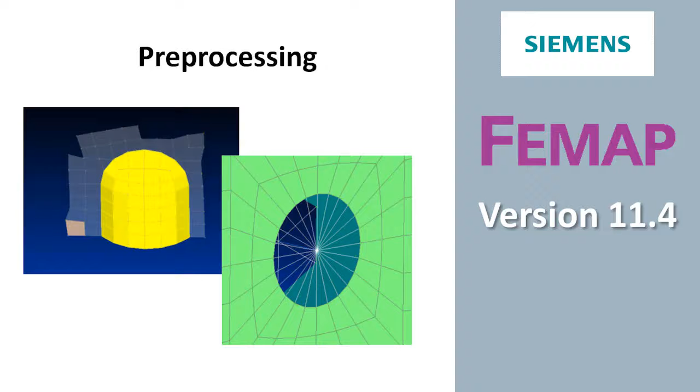Welcome to Femap version 11.4. In this video we'll be looking at some of the new enhancements for pre-processing and meshing.

The Show Entities Autoscale feature helps entity location and visualization by highlighting individual entities or groups of entities. For a group, simply select the group and choose Autoscale to show entities in the highlighter drop-down menu. Femap will automatically zoom up and highlight the selected group.

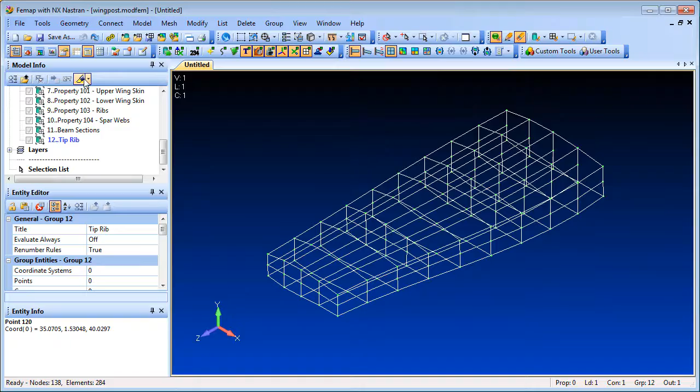Similarly, you can go through the window Show Entities menu and select an entity such as an element. Click the Autoscale checkbox and then select the desired entity to view. Again, Femap will zoom up and highlight the selected entity, making it much easier to locate and visualize model entities.

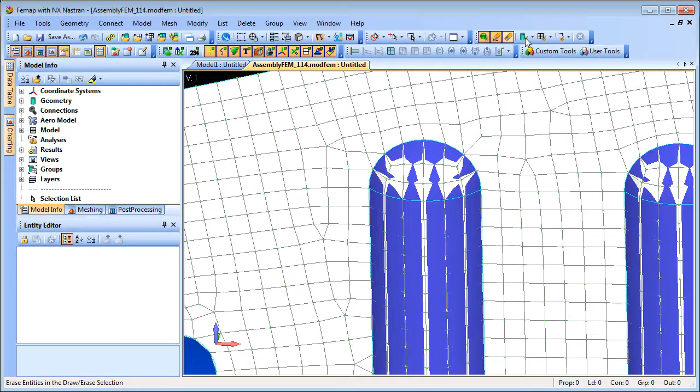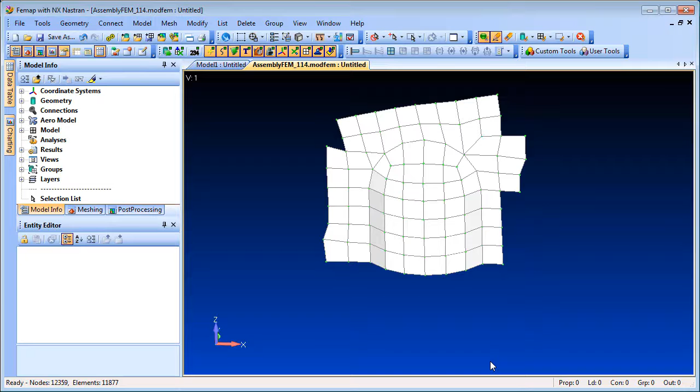The Draw Erase command allows you to select a section of the model to view and work on, and erase what you don't want from view. It's possible to make a selection and further refine it to get exactly the portion of the model you want quickly and easily. In this example, we initially make a selection of elements from the entire model, which can sometimes be a little cumbersome and difficult to visualize. So let's make an initial approximate selection of the portion we want and further refine it.

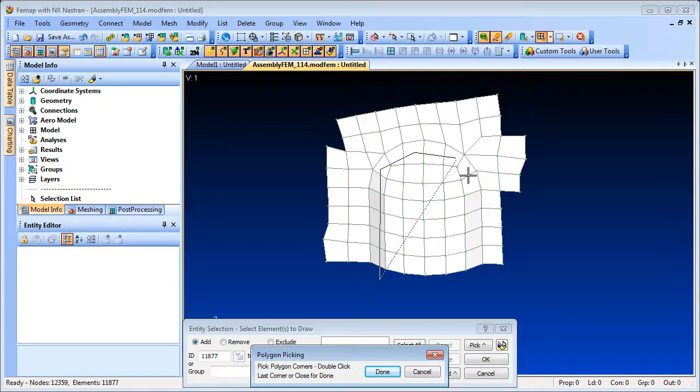To further refine this initial selection, we deselect the Draw Model Select from All command in the Entity Selection drop-down. Now we can go back and make a further selection, just from the previously selected elements rather than the entire model, making it easier for us to get the portion of the model we want.

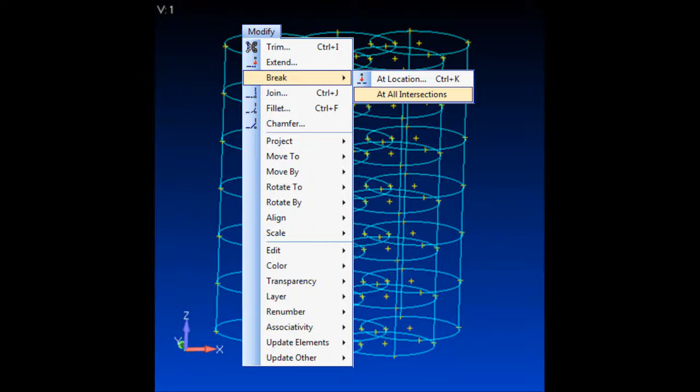The Modify Break command allows all instances of geometry curve intersections to be split automatically in one single command. Select the At All Intersections option in the Modify Break menu, and all intersected curves will be split automatically. This command greatly facilitates the task of splitting intersected geometry, particularly if the geometry model contains many such intersections.

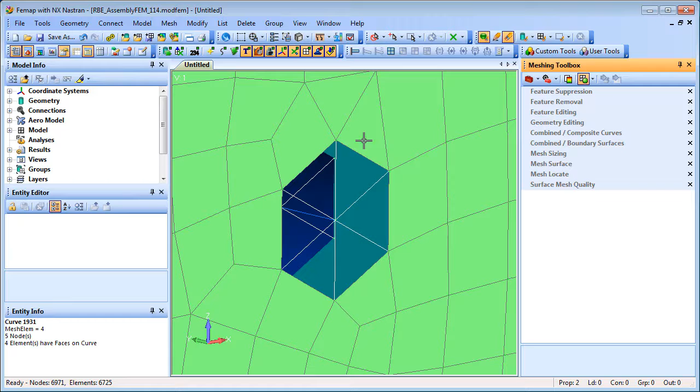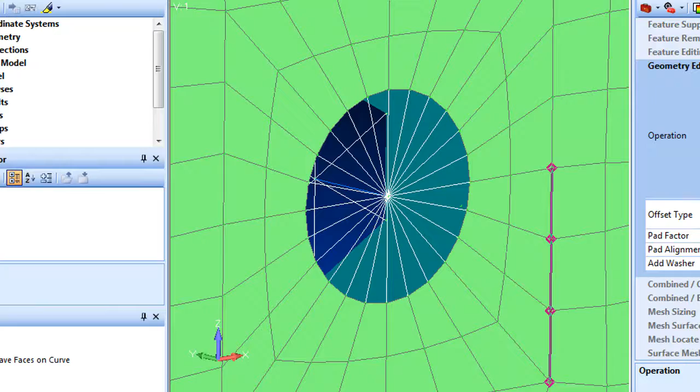Updating the FE mesh using Femap's meshing toolbox also updates any rigid body RBE elements present to match the new surrounding mesh density. Let's take a look at this model, which contains bolt representations with spider RBE elements connecting to the holes. As we update the mesh in the meshing toolbox, either by simply increasing the mesh density of the edge curves or through the introduction of a pad around the hole in this example, you can see that the spider RBE elements also update accordingly. This facilitates mesh updates and ensures that we maintain a contiguous mesh across the different element types in the model.

In the previous case, all of the nodes of the RBE3 were connected to the geometry that was being remeshed. Let's take a look at what happens when this is not the case. We'll edit this RBE and remove a couple of the arms so that some of the connections to the nodes on the surrounding curves have been left out.

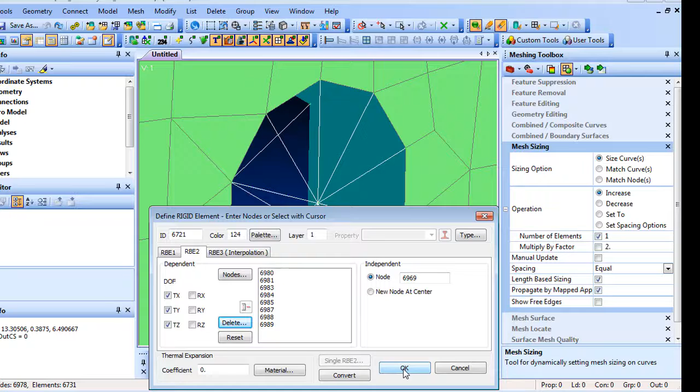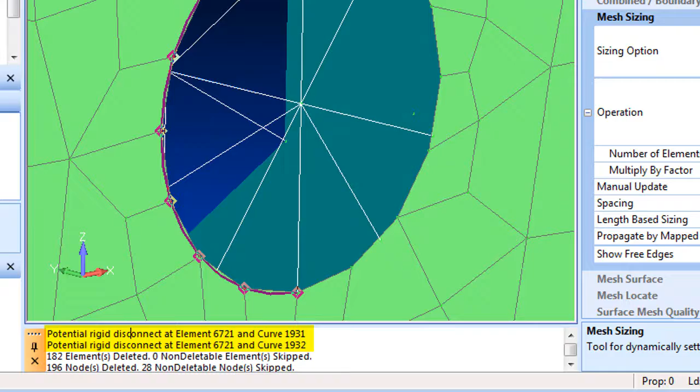In this situation, Femap cannot be sure of the analyst's intention regarding the behavior of the element, and when we remesh the surrounding geometry, Femap will leave the RBE as it is, but will generate a warning message indicating that there are some discontinuities. It's then up to the analyst to reconnect the element manually as desired.

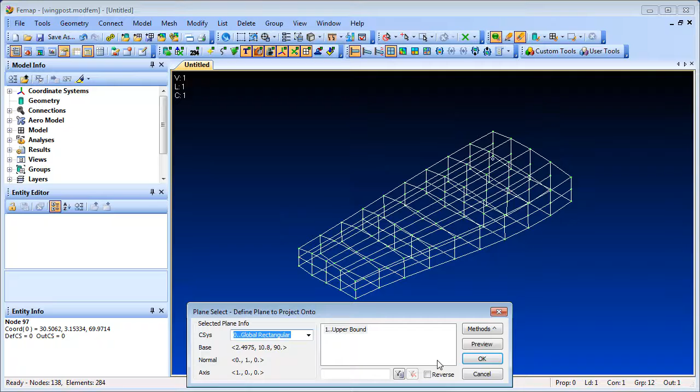You can use Femap's vector and plane editors, which are accessible through the Tools menu, to create, set up and manage vector and plane definitions and save them to the model. Once a vector or plane definition has been saved, it can then be referenced and retrieved later on for further use. Also, Femap maintains a running list of previously used vector and plane definitions, which can also be referenced without necessarily having to save them.

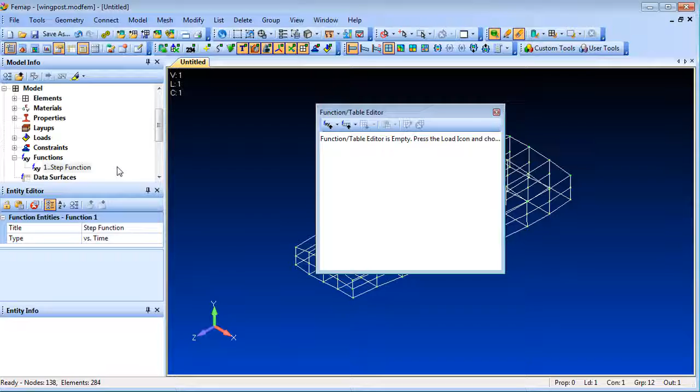As well as the Function Definition tool in the Model Info tree, you can also create, edit and manage functions and tables using the Function and Table Editor, which is accessible through the Tools menu. For all the supported function and table types in Femap, you can create and load functions and tables, and there are Save, Copy, Edit and Clear options available. There are also GUI-based tools in the editor to help create and edit the function or table.